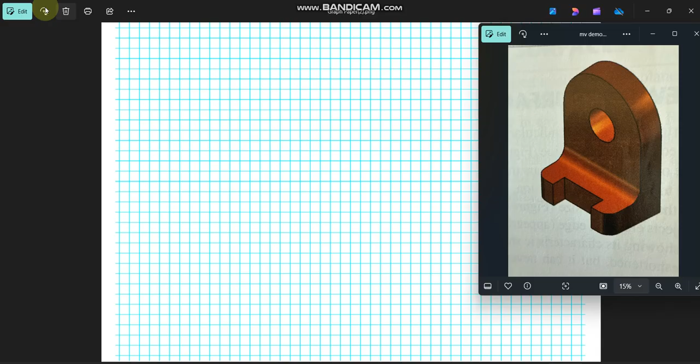So using my graph paper, using my editing tool, I can actually go in and do some drawings with lines. So I can come to my graph, activating my line tool, and start sketching out what does the front view look like. So you were using a grid, so you should have been able to say, okay, each grid was 1/4 inch.

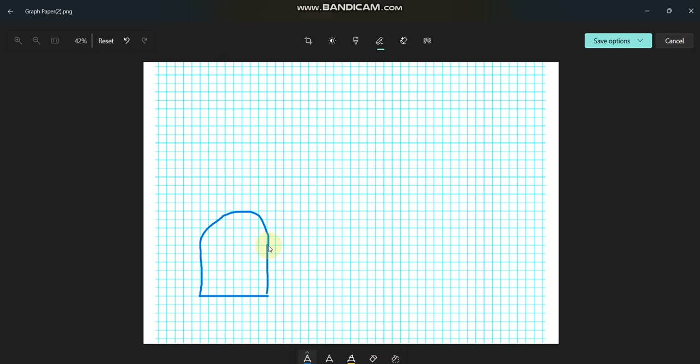This part's not very big, so we'll just say it is 2.5 inches wide, up to the center line of the arc is 1.5 inches, and then here is my arc to complete my shape. Not perfect, but I wasn't asking you guys for perfect. I was just asking you to get an idea of how to draw front, top, right side.

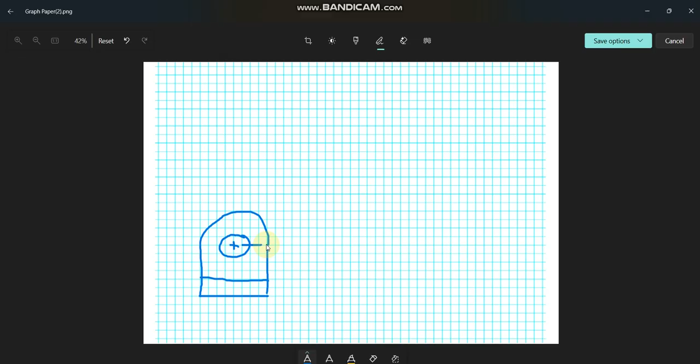There was a hole in the center of this, so off that same center line, I create my hole, and then there was a bottom ledge. So anytime you have arcs, you should also be drawing center lines. That seems to be the most important piece that everybody's missing on the instructions. These are reference points that you have to indicate on multiviews.

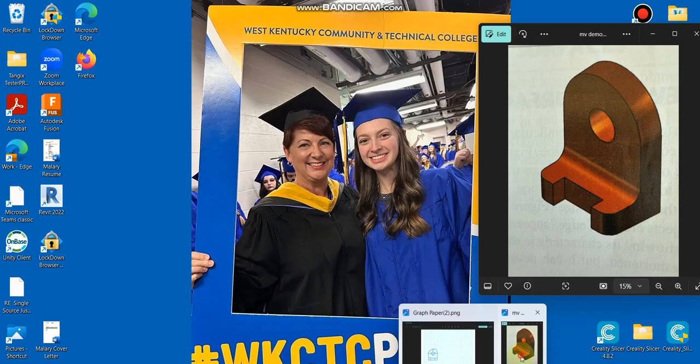This one also had a cutout towards the bottom, so there were 2 edges that looked like this. So by simply looking at that part, I can see this face, I can see the inside face here, this face, the back curve, and the arc. So now I'm going to draw the side view, and it has to be to the side of the front. That's the whole point of the multiview.

It's basically kind of an L shape, everything being 1/2 inch in thickness. Now, the cutout face that you can see in the front represents a hidden line. So this face is showing up just a little bit different in the depth. I still have a center line to reference that that's an arc. And I should have hidden lines referencing there's a hole that's going through that arc.

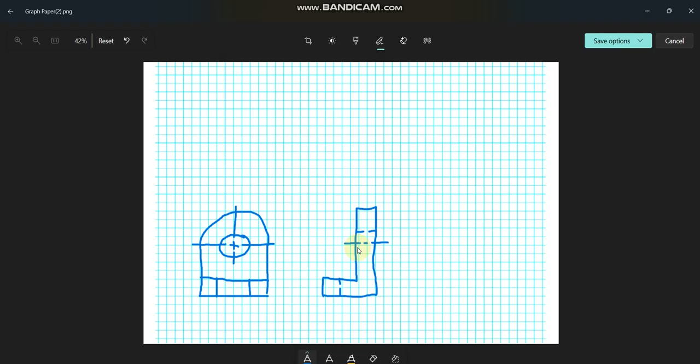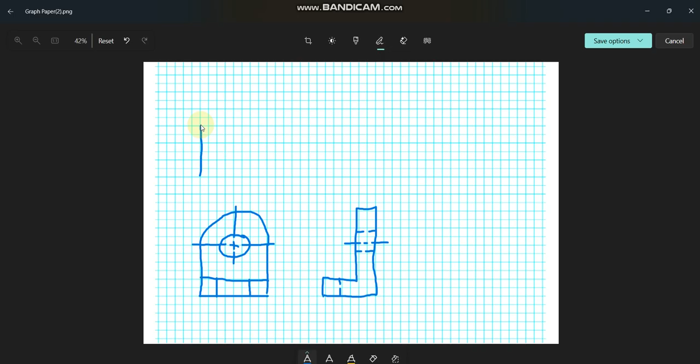So again, looking back at my sketch, I'm seeing the side face is an L. I have a hole that I can't see from the side, but it is going through with a center line. And I have this face that's sitting in. Top view is not going to be that much different. I still have the same depth. Oops, went a little too far there.

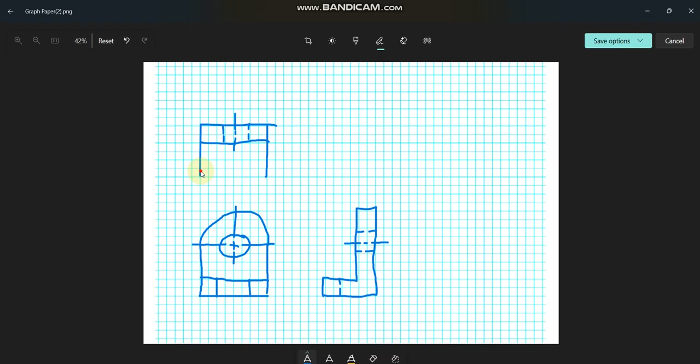Still an arc, so I need the center line to be drawn in. I need the hidden lines to show that that hole goes through the part. Then on the front edge, it does have a slight curvature here. Comes back into the cut, over, across, and then curves around.

So again, looking back at the isometric, you can see the flat edge of the top, the hole going through. You see the 2 curves on the outer edges, and the cut going through. All hidden lines are drawn, all center lines are drawn. That's what you were expected to do on this drawing.

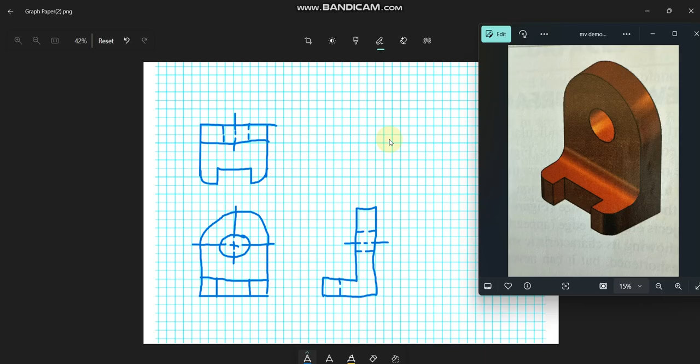The multi-view principle saying that this is the front view, aligned is the right side view, and then the top is directly above it. Because these 2 share width in common, these 2 are sharing height in common. So if I were actually projecting every one of these pieces, I could track it between the 2 views by drawing these projection lines over to those views. Same thing going to the top. Each of these should be projected directly up.

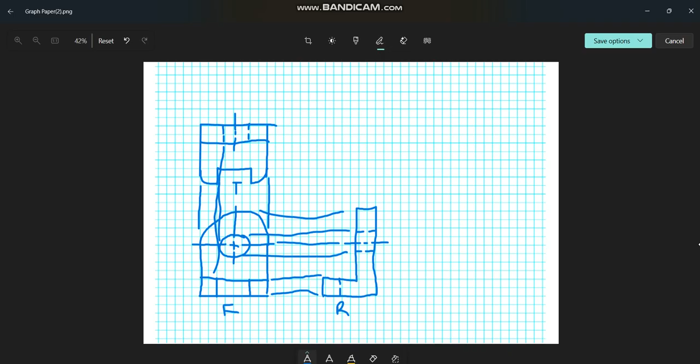So that's what you were supposed to do on that assignment. And the future assignments coming up, you're going to be a little more accurate on your sketching. This was just using the computer software I had for images and being able to sketch on top of those.